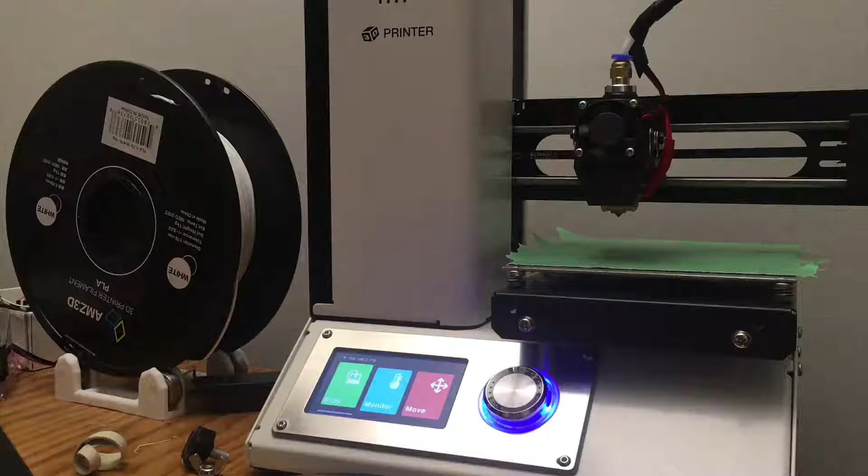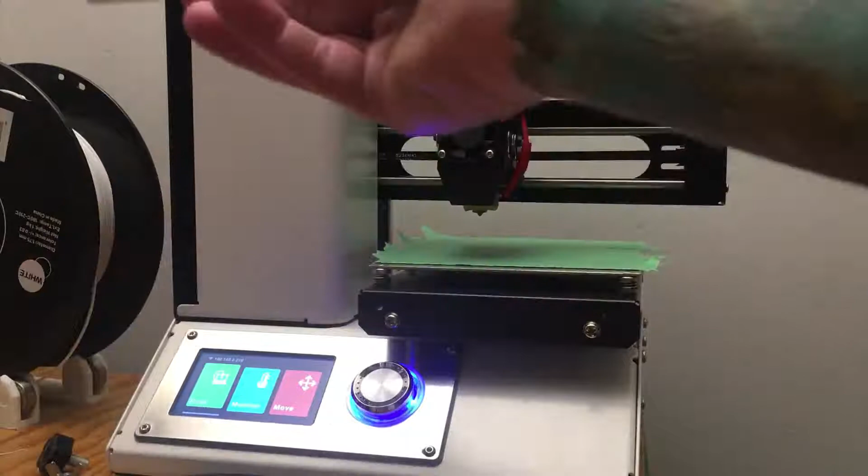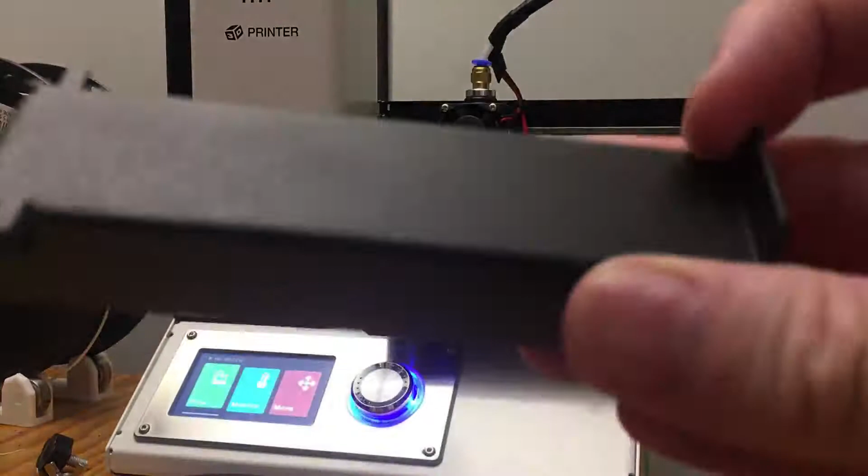I have a Monoprice, I think it's called a Maker Select. It's a little 3D printer. But the PLA filament I bought, the whatever this is called, didn't sit in it, and I had to cut it out. I bought a second roll, and I don't really want to have to drill out the thing, drill out the center.

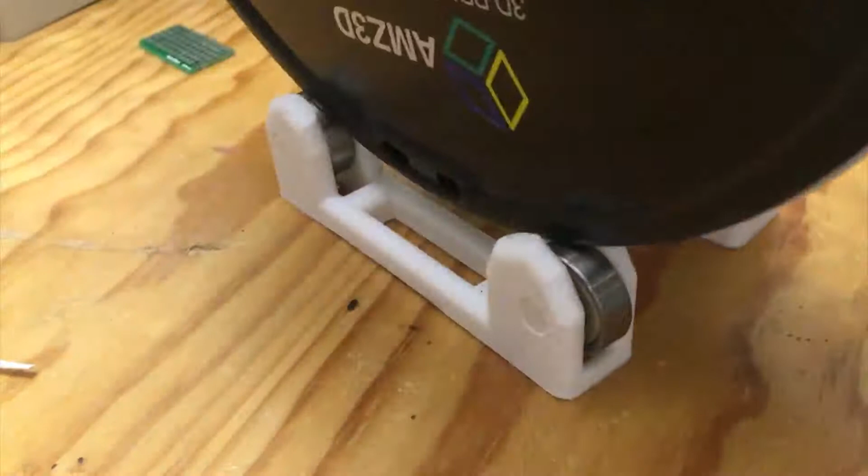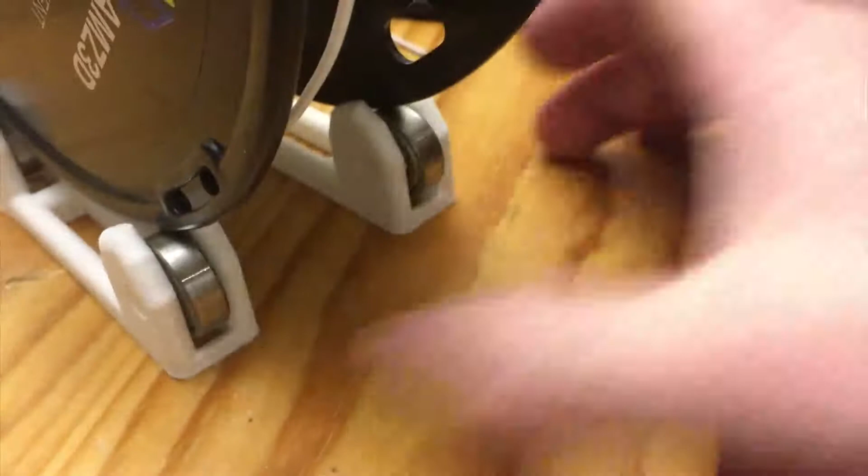So I actually printed a pair of bearing holders here for the filament roll to sit on. So when it's sitting on the rollers, it sits really nicely. Whoa. Well, they need to be sitting straight. So right now, I'm just going to push them into place, put them on. Let's take a look here. There. Okay. So once they're all engaged and right.

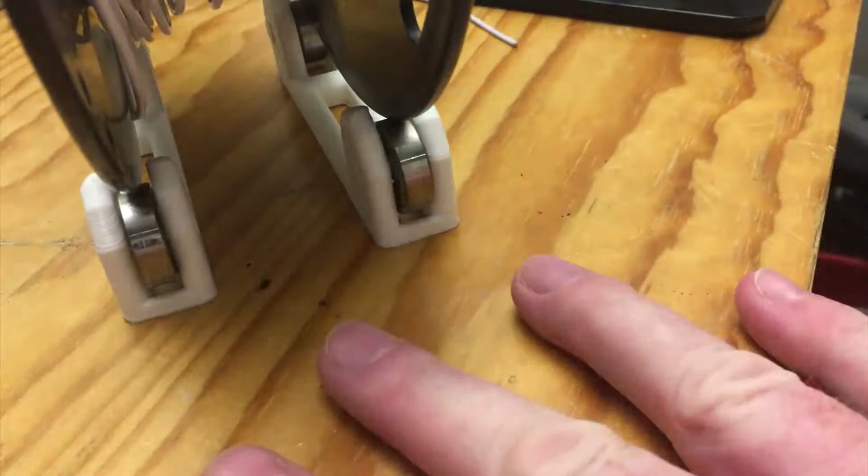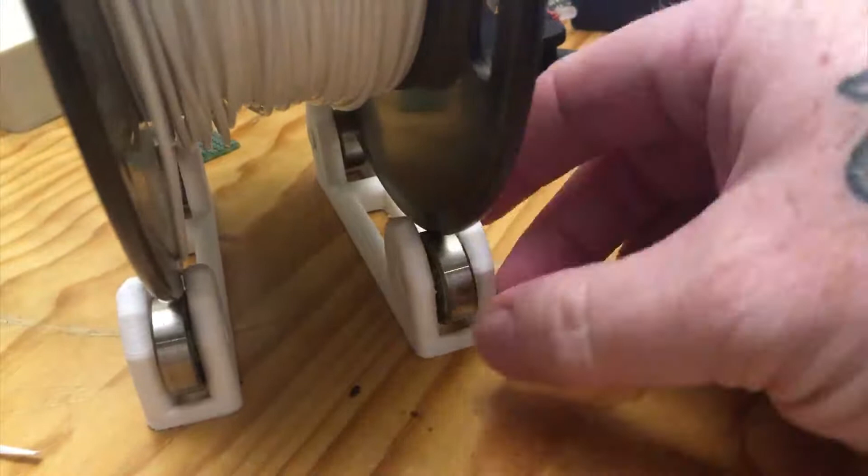So I think what I'm going to do is model up a pair of clips that can clip to the back and the front of these to keep them perpendicular and parallel. And that'll just give some stability to this, because I noticed when I was printing that I was worried that it was going to slip into like a cavity here and maybe have a harder time rolling. I didn't want that to be any kind of issue. So that's where we're at.

So I need really two measurements. One, I need the width of the bearing holder, and I need the distance between the two bearing holders. The rest of this I can come up with pretty easily. There's one more distance, which will be the height below the bearing for this bracket. But those are the two main distances.

So of course, always with the calipers, right? Everybody, let's use calipers, because nobody likes messy dimensions. So I'm going to position the holders where I want them to be, the distance I want them to be, and measure that out. I have 37 millimeters. Okay. And then the width of the holder is 19.96. I'm going to put 20 just for the sake of not worrying too much about it.

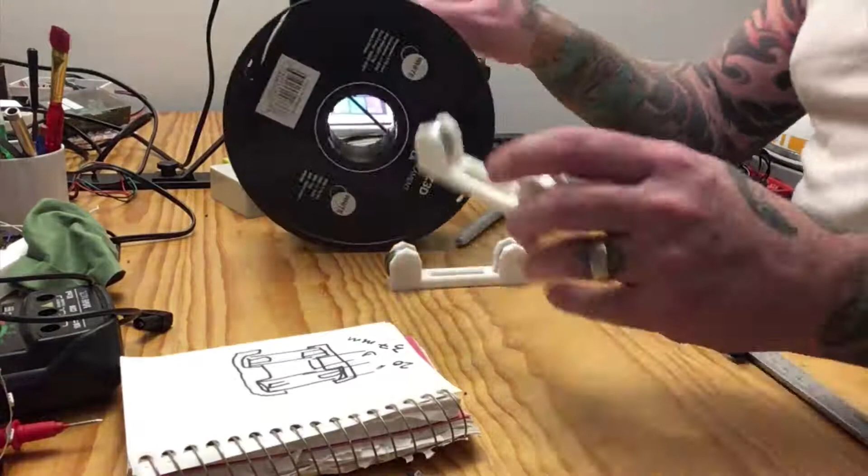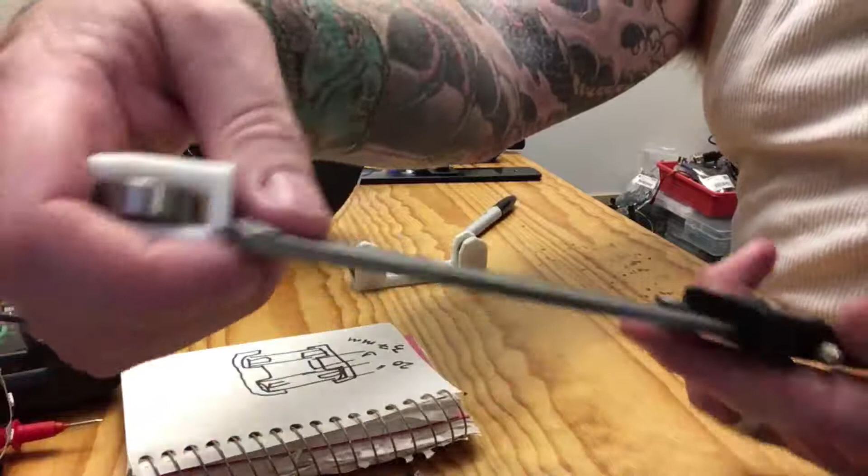And I am going to measure the height of these things. What I'm looking for is the height here, so that I don't interfere with the bearing at all in its operation. And I don't know if you're aware, but this portion of a caliper can measure the height of something. So if I put my bearing down here and I push down, I can get the height of my item by adjusting.

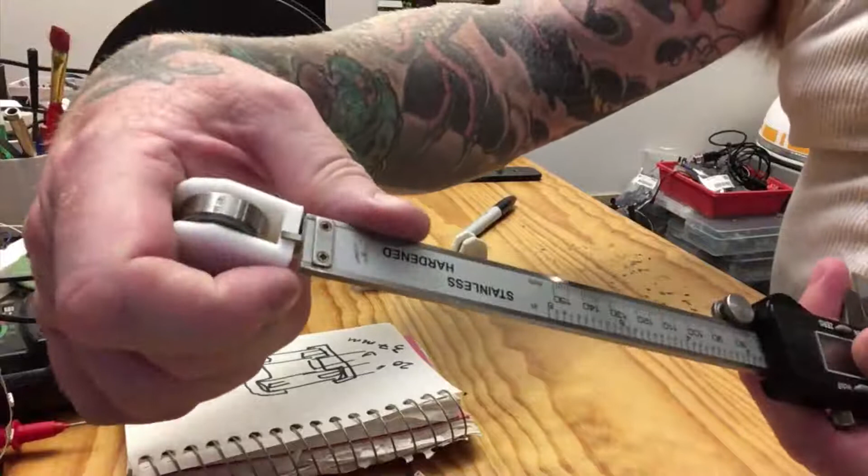Oh, I'm going the wrong way, sorry. Okay. Well, there, see? That gives me my height. It's a little high, but there we go. Like that. 4.82. So I'm going to go 4.5 height just to be on the safe side so it doesn't interfere. And that's thick enough that it'll get me where I need to be. And yeah, part 2, y'all.

So now I'm going to take those simple measurements and make the 2 brackets that'll go on either end of the filament holder. So I'm going to start a new design. I'm going to start a new sketch. I'm going to make a simple center point rectangle. At some point I should be able to see the, yeah, there you go. So I'll choose the top.

The frame rate is not good thanks to Action. I don't know exactly what's going on. Part of it is I think that Autodesk Fusion 360 is quite the processor hog, and then I'm also doing this other thing. So, all right.

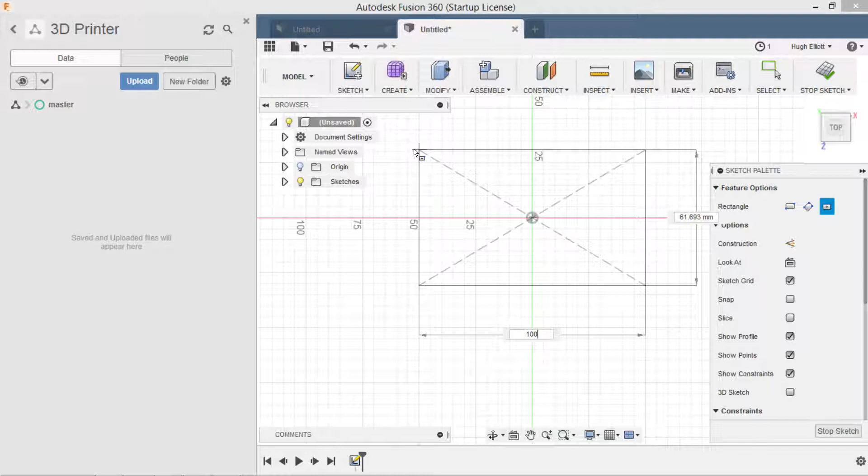Okay. Actually, there might be one more measurement I want, and that would be the depth on the holder. I'm going to say 20 millimeters. So I'm going to make the brackets 20 millimeters deep. Okay, let's put in a basic value here. We said 37 and then 20. So 57, plus 20, 77. Plus, let's go 5 on each side. So 87.

Okay, 87. And then we'll go 20 thick, like that. And that gives me 1 holder. Once it actually says yes, okay.

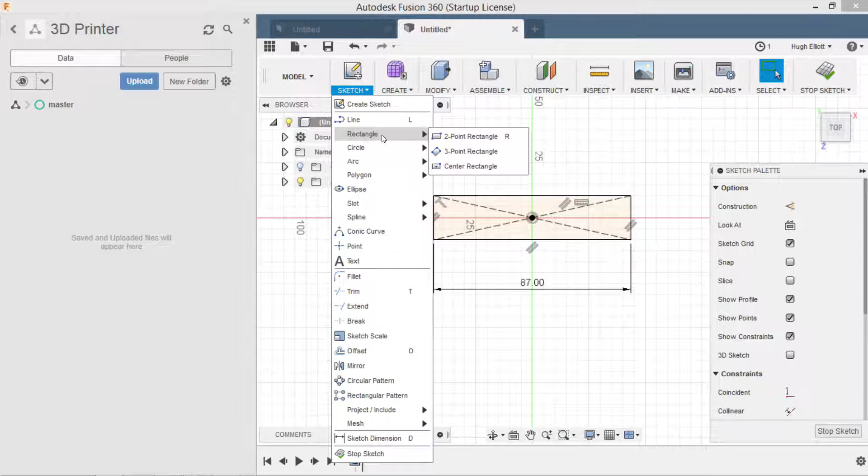Then I'm going to take another rectangle, but this time a 2-point rectangle. I'm not going to lock it into position on anything. I'm just going to draw it in a random spot.

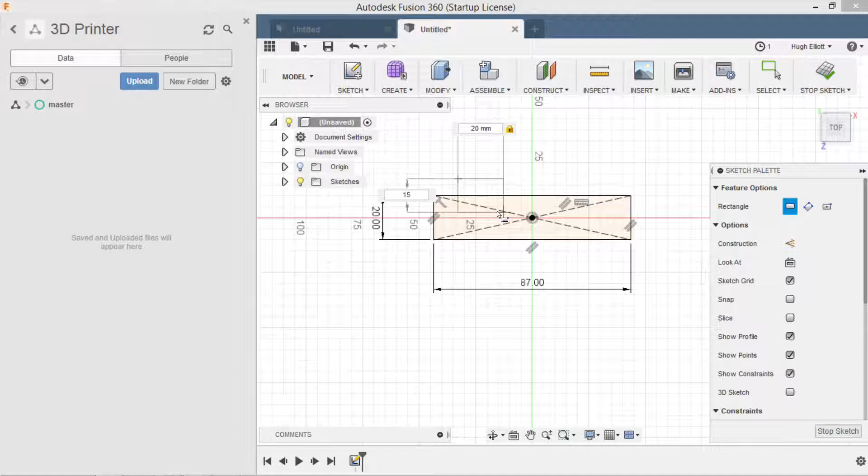I'm going to make the width 20 millimeters, the depth of the width that I'm looking for the holder. And then I'm going to make this 15 millimeters, and that gives me a 5 millimeter border. Okay.

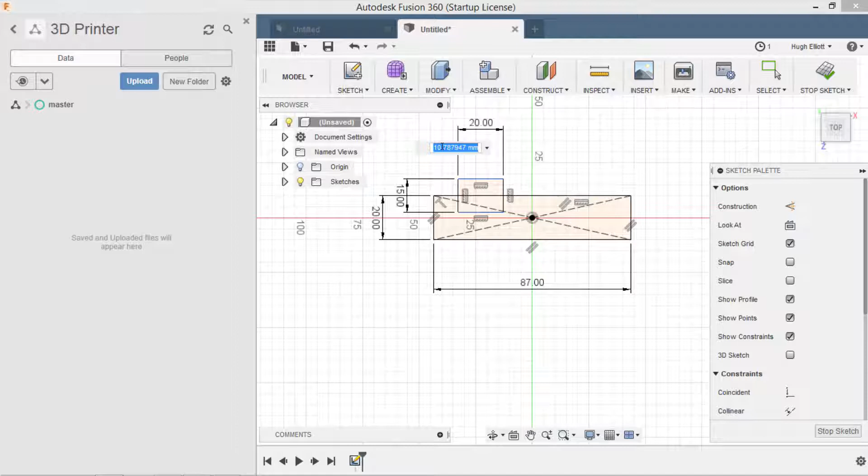Then I want to set dimensions on this. If you click on one edge, click on the other, you can say that dimension is 5. This actually also has a value, so when you do parametric design, D5 is the value, 5 millimeters. I can take that exact same dimension and apply it here. I say D5, and that'll position it where I need it to be.

Then I'm going to take this value, so D3 is 20. And then this value is D4. And I'm going to make a second rectangle.

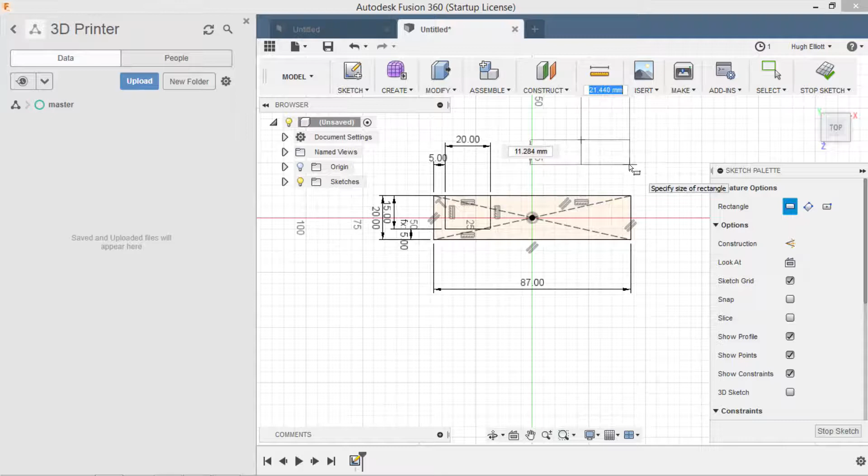Again, doesn't matter where I put it in this case. So D3 and D4. And then I'm going to add my dimensions here.

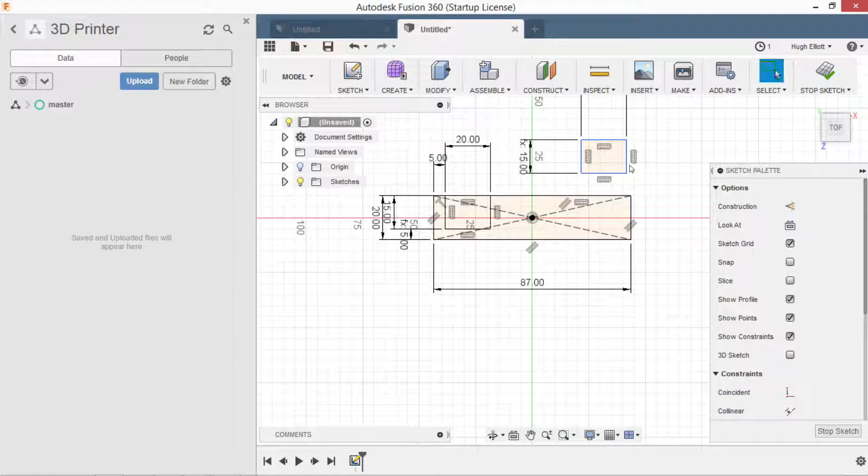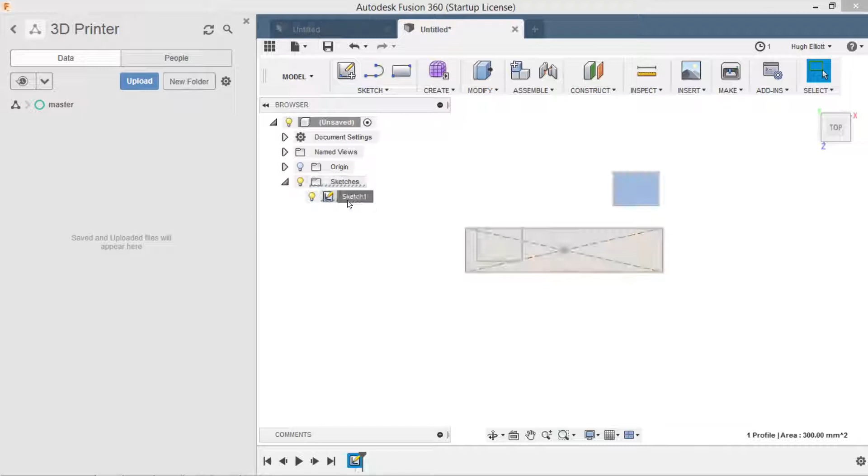I didn't think this was locked to anything, but we'll see. Oh, I guess I need to actually be in the sketch. And again, that value is D5. And then this shouldn't be locked to anything. I hope it's not, because that would be crummy.

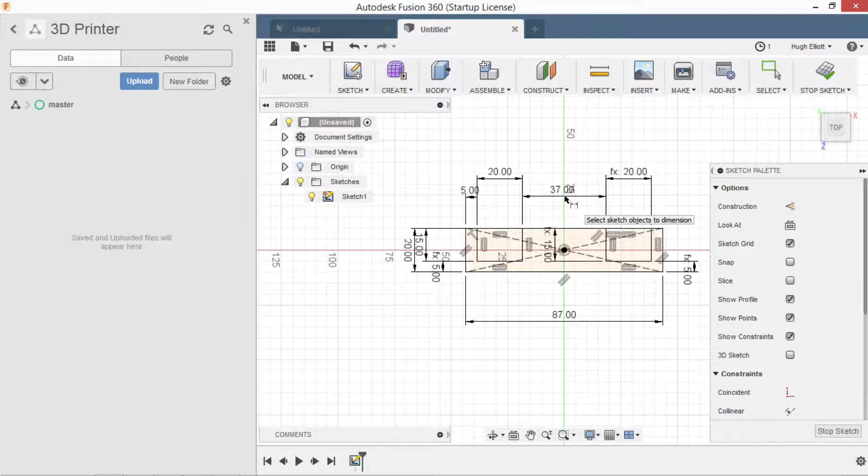It sort of seems like it is, right? I wonder if maybe I can. I'm kind of hoping I don't need to worry about redoing that block. Oh okay, well 37 is close. So this, I wonder why. Yeah, it's 5 anyways. It's okay, so I won't worry about that.

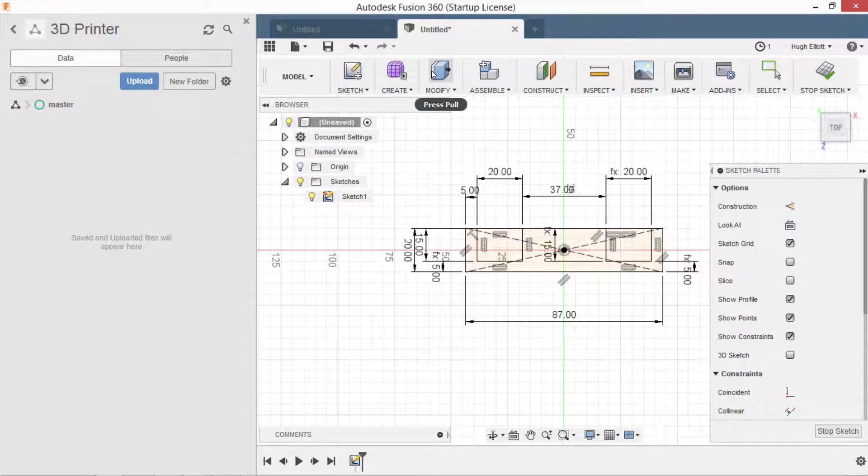Well, anyways, let's get our extrude going here. Choose this. What did I say the thickness was? 4.5 millimeters, so we're going to say 4.5. New body.

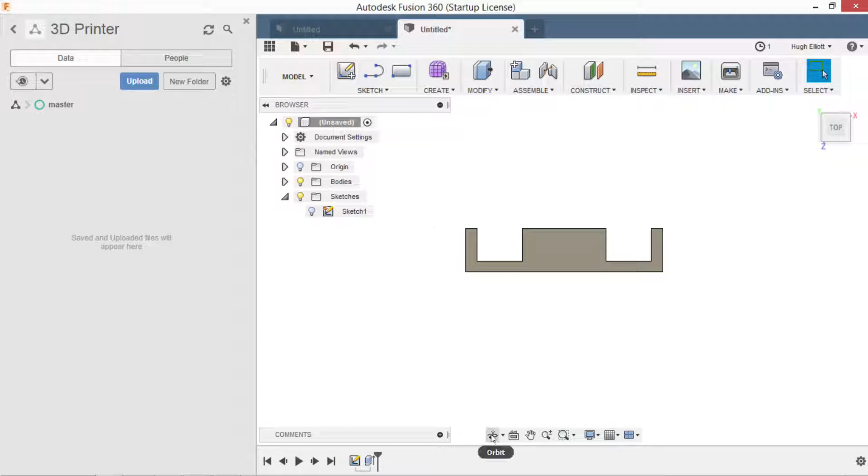Oh my gosh, I'm not very good with a PC, but you can see. Yeah, so that's my super basic bracket. I'm going to add a couple little nuances to it just to make it prettier.

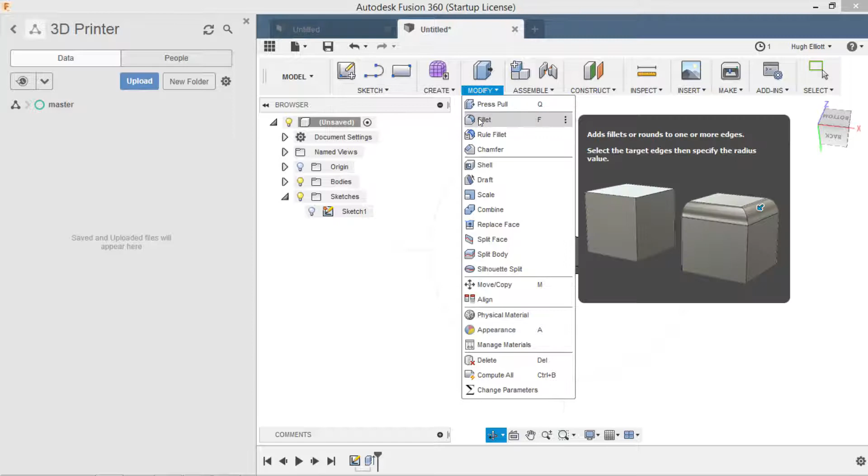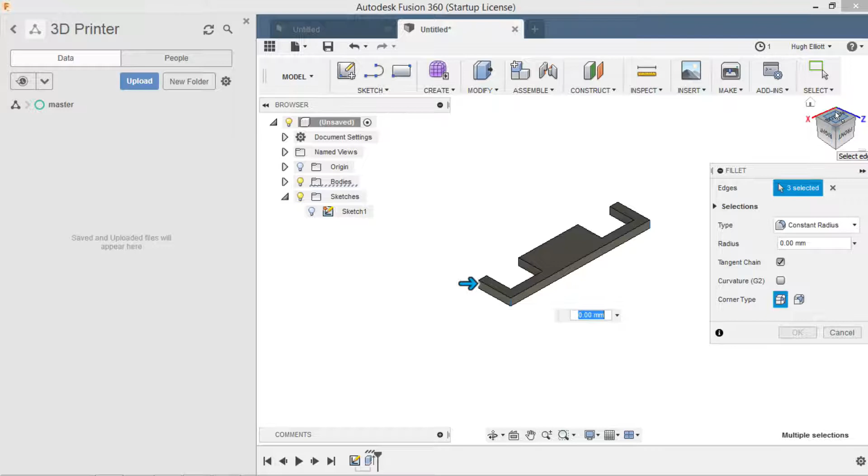Specifically, I'm going to add some fillet because I like my rounded edges. So take that corner here so I can see the corners. And I might, nah, should I do the front top? Nah, that's fine, these will do. Maybe that one, and then I just sort of circle around to get to the back one.

And we'll just say 3 millimeters, see what that looks like. Pretty good, okay, so that'll give us some rounded edges, make it a little nicer. We say okay.

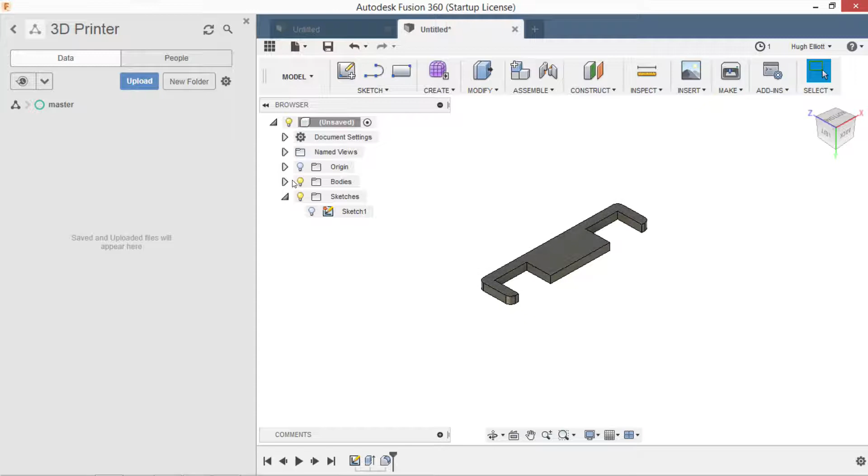And then we take that body, select it, and we say make 3D print. And it creates a mesh, which we're going to send to Cura.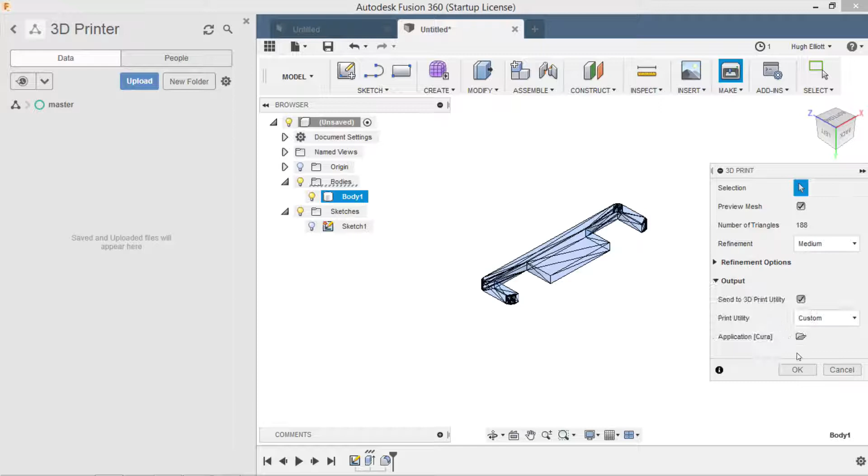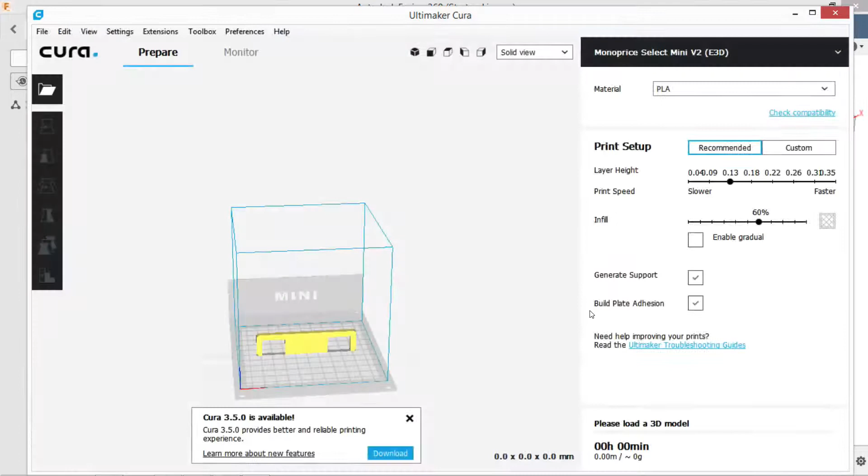Which I hope it'll send to Cura. It should do it. Okay, I don't really need to do that now.

Snap rotation, lay flat. Oh, see, that thinks it's flat, but it's not. So we'll just do it that way.

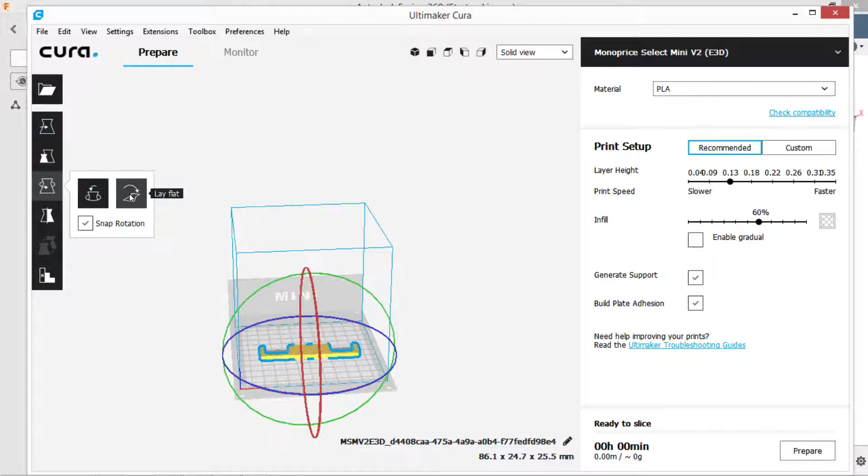There we go, so that is good. So then we're going to select that model and duplicate it because we want to print both at the same time.

I've got lots of space on the bed. See here? There we go. Okay, generate support, build plate. Sure, why not. Build plate, let's prepare.

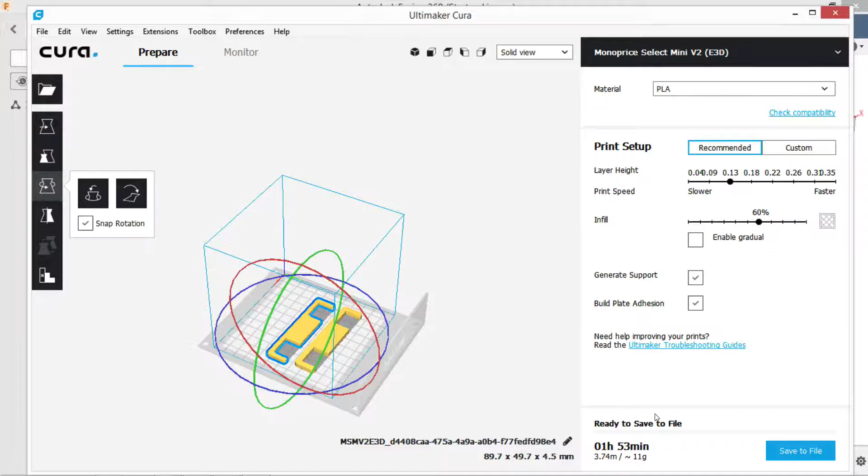A bit of cleanup. My printer is apparently not particularly well calibrated yet. I did calibrate it a little bit, but it does seem like there are still some issues with bed height in at least one corner here.

So, anyways, moving on. Let me grab those bearing filament holders. Let's see how these fit. Oh well, they do fit.

And so now what that does is create the stability I need. Right? And here we are. Yeah.

It's nice. I was worried because what has happened is these have moved back and forth, and I always worry that it's going to fall into the groove, but it doesn't. I mean, it's not going to do that obviously, but this keeps them parallel and secure. I would say that's a successful project. Yeah, good job. Thanks for watching.